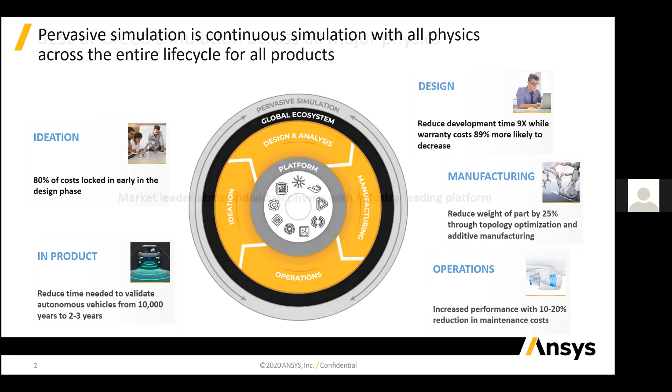ANSYS will basically give you multi-physics information, and by using that multi-physics you will get a platform. In that platform you will have material information; ANSYS has Granta materials, with more than 2000 materials available, and user-defined materials are also available.

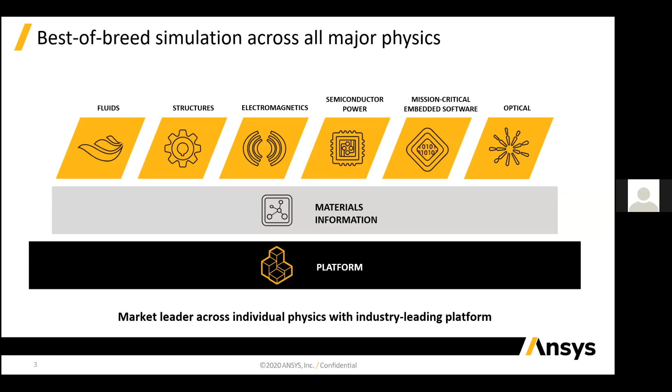Then you can do fluid analysis, structural analysis, and electromagnetic analysis. In that you will do the motor designing, low frequency and high frequency analysis, and noise and vibration analysis. These come under the electromagnetic part, and semiconductor power, and you can also do optical analysis, and get a fair idea about your product designing part.

So what Ansys will basically provide you is a solution for the electric vehicle. Ansys will give you design and development for EV. It will provide you a virtual lab, and that virtual lab you can access anytime, anywhere, and at any scale. Like if you have designed a prototype and you want to change the motor from induction motor to PMSM,

or you want to change the motor type and the controlling technology, like P controller, PID controller, and many other things, like the incremental conductance method, or you want to change to a solar driven electric vehicle. The same prototype is used, you only have to change the machine part. So that was the advantage.

It will provide you a virtual lab, and in that you can do fluid dynamics, structural mechanics, electromagnetic systems, and material science. These are available in Ansys, so you can do that analysis.

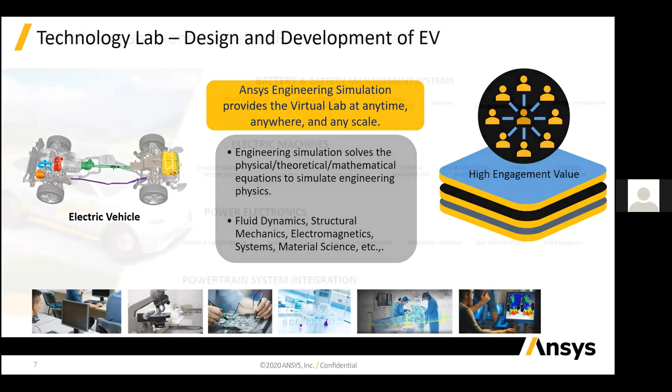So what are the main pillars and main areas of the electric vehicle? If we categorize, it is divided in four parts, like battery and the battery management system, which we will discuss in later slides. The next important part is the electric machine. Where we have IC engines, in EV we have electric machines.

And how we will control that electric machine is by using power electronics devices. Like if the driver wants to run the motor at 1000 rpm, we have to take care of how to control that. So there, power electronics controlling is very important.

After designing your battery, your electrical machine, and your power electronics, the next thing is to make our system run in an integrated manner. How will my integrated system behave if I connect my battery with the machine and the power electronics, and what is the behavior of my machine? That comes under the powertrain system integration part.

First, you can see one paper cited where the 3D model designed in ANSYS predicts information consistent with the experimental results they got. Say you are designing a cell and you want to change from lithium ion batteries to a fuel cell or any other cell technology. You want to change the material of the electrode.

That can be easily designed in ANSYS, and you will get a fair, consistent idea: if I use that type of material, will the capacity of my battery increase or decrease? You will get the anode and cathode information, like the mesh on the surface. You get these things when you design your battery. So the first step is to design your cell. After designing the cell, we will pack our cell.

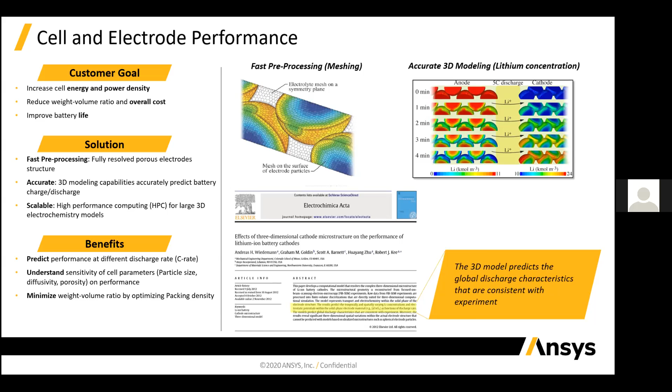After designing the cell, you have to make the end plate. After connecting the cell core to the end plate, the next step is to create the module mesh. After completing the module mesh, finally we want to know the temperature and the current density of my battery.

These things can be analyzed easily using the temperature contour, which will give the information, and the red hot part will show. That red hot part tells you the battery is getting heated at that part only. So we just have to analyze that part and ask how to mitigate it. In software we can easily change the values and redesign our whole battery system, then reanalyze it and check what temperature it is reaching.

For the battery, one more problem I would like to address here: if you are going from Kashmir to Kanyakumari, the temperature varies from one place to another. So sometimes the battery needs to heat up, and sometimes it needs to cool down. You have to design a system that keeps your battery within a certain range.

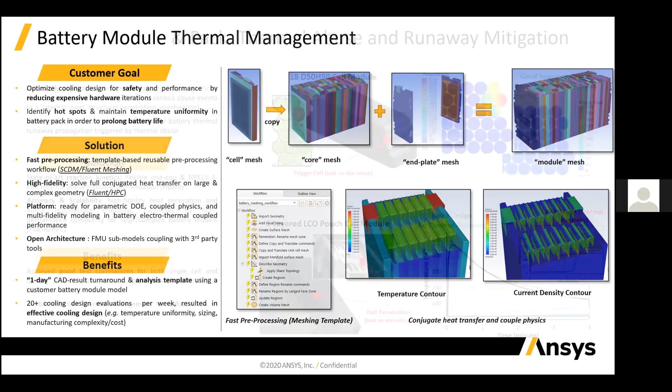Next, after the cell is designed, the end plate is connected and you have created a module, the battery module and pack system are created. After creating the pack, thermal abuse and runaway mitigation is very important. If your battery is getting heated to a certain temperature, you can see here it is heated at this part. A red hot part is created here.

For that red hot part, you have to create a controller so that it is reduced and comes under our specified temperature range. You can see in the graph: with a good design, no thermal runaway happens, and with a bad design, thermal runaway happens many times.

So you just have to go through that when you are designing that battery pack. And this is the main and most important part of your EV. If your battery catches fire, this will basically ruin your whole startup and whole company. If any fire, accident or crash happens, this battery should not be burned. So that has to be considered by doing the crash analysis of your battery. What was the survival of the battery?

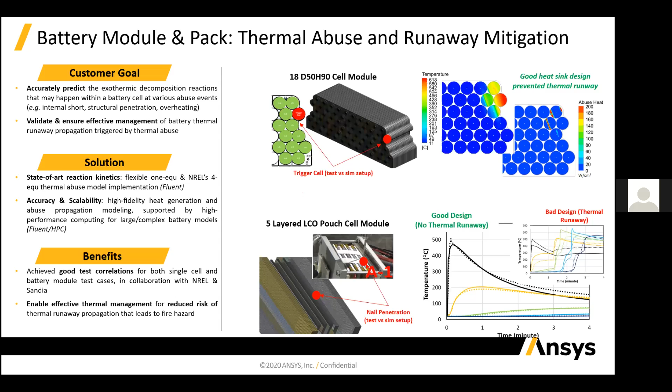So for that, you finally require a cooling system. An air cooled system is already there. So you just have to check whether I will provide an air cooled system, or I have to go for a liquid cooled system. So how will Ansys basically help you in that?

In Ansys, you have designed your whole thermal model, and with that thermal model you will do ECM modeling, equivalent circuit modeling, and in that equivalent circuit modeling we just have to connect it in series and parallel to make the thermal model compatible with the hardware or experimental model. After connecting that, we will analyze it, and after analyzing we will come to know what maximum temperature it is reaching by using the air cooled system.

And for that, Ansys tools like Twin Builder and Fluent will basically help you in designing that. And this will basically reduce your main timing. That timing is very important in today's market. You can see many electric vehicles are coming to the market, but the one question people will basically ask is, kitna deti hai.

That is the very important point when you are designing your EV, because the customer will basically ask you a simple question like this, kitna deti hai, meaning they are focused on: I will use your electric vehicle, but I require that much mileage. So that is the very important thing, and the size of the battery is very important. So you just have to reduce the size and the weight of the battery.

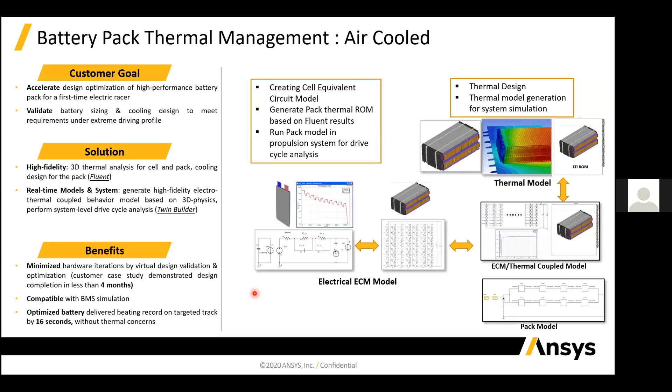For reducing that, you require a more efficient motor. If your motor is efficient, you can easily reduce your source side. And for using that perfectly, you require a battery management system. But before going to that, we will first look into the air cooled system.

So your battery is designed, you have checked with the air cooled system, but your air cooled system is not able to provide that particular value, not able to cool it down. So then you require a liquid cooled system, and in that liquid cooled system you cool it down, and you just have to check, like you can see in this example, this point is heated. So we will mitigate this and we will reduce this. That is the main goal.

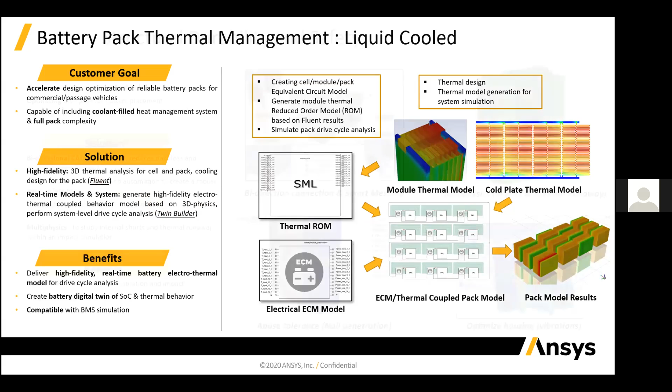We have to check the state of charge and the thermal behavior, and in that part, software like Twin Builder and Fluent will basically help you in doing that same analysis. This is like we have already discussed in the air cooled system. So your battery is created and you are satisfied with the performance of the battery.

The next thing is the durability and the safety of the battery, and how to optimize the vibration part. Your electric vehicle is running, which means you will get vibration. So will my battery survive the vibration? And for that we need to do the nail penetration test. The nail penetration test will basically give you the abuse tolerance level, how to check that.

Okay, and bidirectional smart meshing is there, and the multi-physics impact like thermal runaway, which we already discussed. Next we can also check the vibration part, like if my electric vehicle is running, will my whole system survive the vibration or not. So that we have to check by using this.

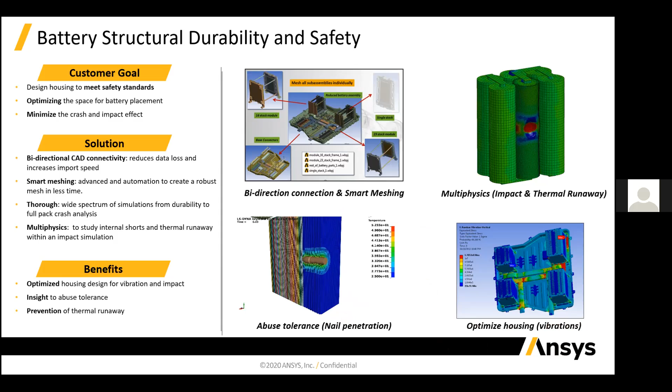So after checking the battery structure, durability, and safety, the next step is battery compliance, EMI, EMC. And in that EMI, EMC part, we can see your battery is connected to some filter design.

You have to design that, and that EMC/EMI filter will basically help you to detect and mitigate the noises, so the noise from the machine, the noise from other electronic devices and the noise from other equipment will not affect the performance of your battery and the battery management system. So you just have to take care of that when you are designing your whole battery system.

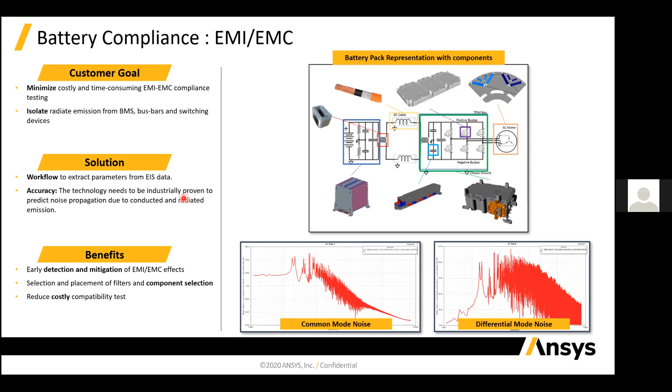So after designing the battery, now you have to connect the battery with the whole system, like the powertrain system. For that you require a model-based system, and you also require a system architecture, software components, and ROM. ROM is basically reduced order modeling.

So now you have connected the whole system, and after connecting the whole model-based system, we have to check it, since many safety standards are there, like ISO 26262. So I have designed it, and after designing I am checking if it is up to the safety standard or not. That is also a very important part when we are going for final designing.

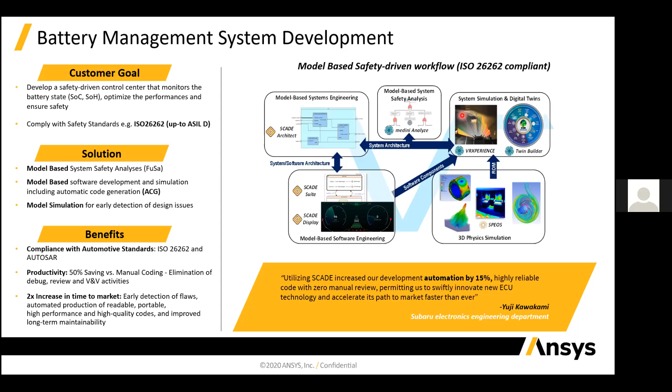Then we have created our battery and the battery management system, and we want to connect it and check whether our model is running as a plant or not. So how can we check it? We have to create an environment like the real-time environment, and by using that real-time environment we have to compare.

After comparing your simulation model, like you have designed your CFD model and the cell HPPC test, and connected it with the battery management system control, you are doing the transient dynamic analysis, and in that you will be able to easily check if the range is reached or it is going beyond your range. So that you just have to check.

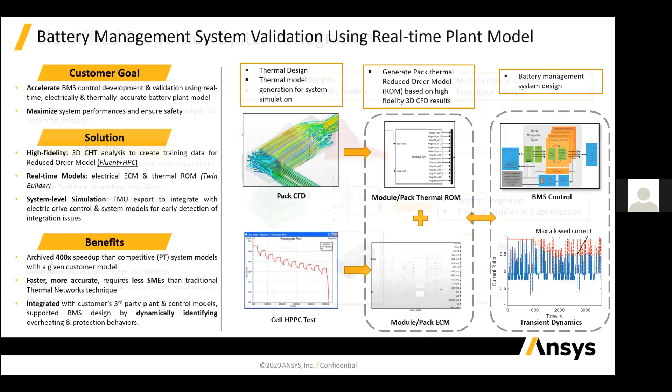Okay, next you have to use the whole connection, the electrified propulsion system integration part, and check the behavior of the battery. For that you have connected a battery, and there is an interior permanent magnet motor, and these are the characteristics of the motor. You import the motor part here, the traction motor PMSM, and that PMSM is connected with the power electronics devices, and the power source, the battery, is there.

So the battery, power electronics device and motor are connected, and you look at the behavior of the whole integrated system, whether the battery is performing well or not, so we will easily be able to check it. This will reduce your time and give you an accurate predictive system. And if you import the same simulation to the hardware, you will get the same result as the simulation.

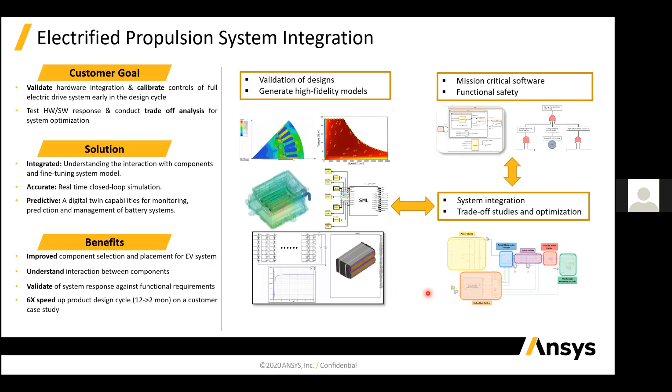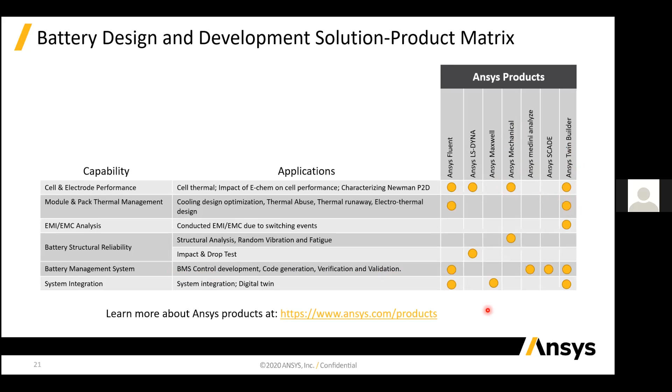Okay, after designing the battery, now you are designing an electrical machine. In that electrical machine, what is the main goal? What is the energy efficiency of my motor? What is the power density of the motor? What is the size of the motor? If you want to make a small electric vehicle, the size of the motor cannot go beyond a certain limit, so size is also important.

What material is involved in designing the motor, like is a permanent magnet involved or not? If PMSM or BLDC is there, then a permanent magnet is involved. So we also have to look into the availability of the materials and the designing part.

And in that you will require fast innovation. And for that, you require the electric machine team, and they will basically provide you information about the torque-speed characteristics and the efficiency map of my motor. So they will basically provide you information related to this.

And the next is the thermal design part. In the thermal design part, what temperature my motor is reaching, and what is the behavior of the BH curve of the motor, the material of the motor. So that will be very useful when you are going for the final prototyping of your design.

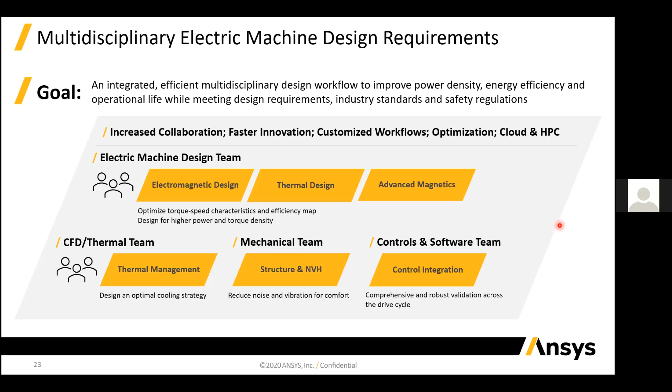And then you come to the control and software team, the control integration part. Like you have provided a drive cycle: IDC is the Indian drive cycle, and MIDC is the modified Indian drive cycle. For that particular drive cycle, what is the behavior of your motor? So you can check the drive cycle to see whether your motor will run perfectly or not. And if you include slope also, you can check your motor performance.

So the main thing is the design and specification, like what motor we have to select for the particular application. Like if you are designing for an e-rickshaw, there is a constraint that speed should not go beyond 25 kilometers per hour. So we have to take into consideration which motor I will select for that particular application, and the selection of topology. And the next step is to check the efficiency map and the flux density.

And for that, Ansys will provide you Motor-CAD, and in Motor-CAD you can do the magnetic analysis, thermal analysis, and mechanical analysis, and you can do the efficiency mapping and the performance analysis using the drive cycle already present there. So for fast calculation and fast checking of your motor performance, you can use Ansys Motor-CAD. And you can also do the optimization part there.

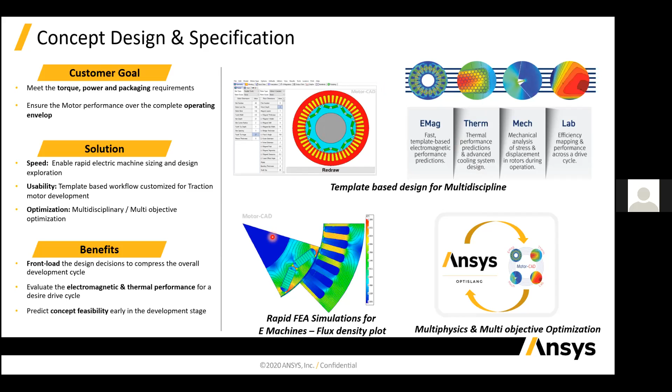And in that optimization part, there are many factors involved in the design of the machine, like slot number, length, magnet length, and the angle between the magnets. That is also very important. So you just have to check, if I change something in the design, what behavior I will get. You can easily do it in Ansys Motor-CAD, and it will easily give you the thermal performance, and you can predict the performance at the development stage.

And then we have the advanced magnetic analysis. In advanced magnetic analysis we can select the material, and we can also run simulations through HPC, which is high performance computing for electromagnetic modeling. This will improve the performance analysis in greater detail. It will also give you information about the material characteristics, BH curve, and the many performance trade-offs. You can also check the demagnetization, magnetization, and robustness of your motor. And by using optimization, you can also reduce cost.

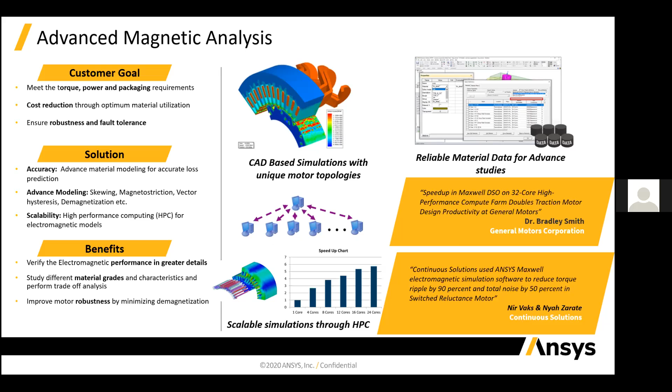And after designing your motor, the main thing is the efficiency map and the torque-speed. You can see here an efficiency map of a motor, and the blue dots are a driving cycle imported into the efficiency map. From that driving cycle, you will come to know the behavior at starting, like the starting torque at low speed, and after reaching 4000 and 8000, the behavior of torque and speed. So you just have to check that.

And you can also come to know about the performance of your motor. So you can also do that part. And Ansys will basically provide you a machine toolkit, and in that toolkit you have to select what type of machine you are interested in, what type of control strategy you are interested in, and you can basically run your machine.

And you can also see here, the experimental result is here and the simulation result is there, and you have done your simulation in Ansys, so that simulation will accurately predict the electromagnetic performance. This will give you information that you can believe the simulation part: if I'm making such changes in my simulation, the characteristics and behavior of the motor I will get in the experimental, so we can also check it and compare it.

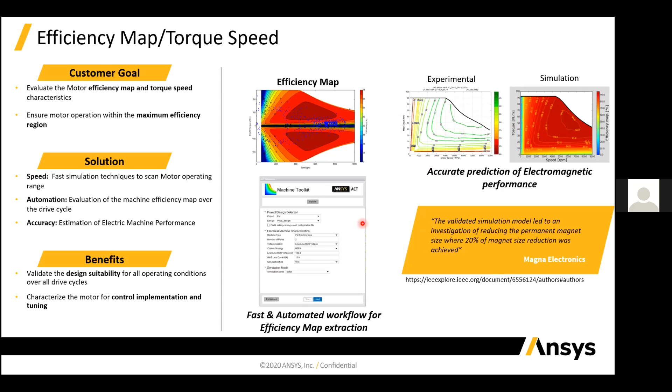And the next part is the thermal management part. You have designed your motor, and like we have designed a battery and we have to cool our battery also, here we have to cool our motor. For cooling that motor, we have the magnetic field, the EM loss components, magnet loss, core loss, and the copper losses, and then we want to map those losses to the thermal management, and from that temperature we can also map it.

And after doing that, you can see here oil spray cooling is there, so you can also change that cooling part. One of our customers, Lucid Motors, increased the efficiency of the motor by doing that temperature prediction. You have designed a motor and only some part of your motor is getting heated, so you just have to take care of that part only.

And if you take care of that part, then you are able to increase the rated temperature, and you can also increase the effect. You can also provide your motor effective cooling, and you can also reduce the size of your motor.

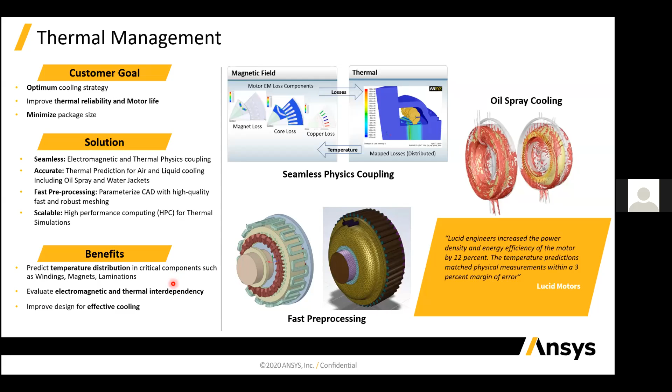And you have designed your motor. Now noise, vibration and harshness analysis is very important when you are finally selecting your motor. So the noise vibration test uses MBD, multi-body dynamics, on the motor you have already designed, and then we use realistic sound. That will create a waterfall diagram, which gives information about the noise, and where the noisier parts are, we will easily be able to detect and then remove them.

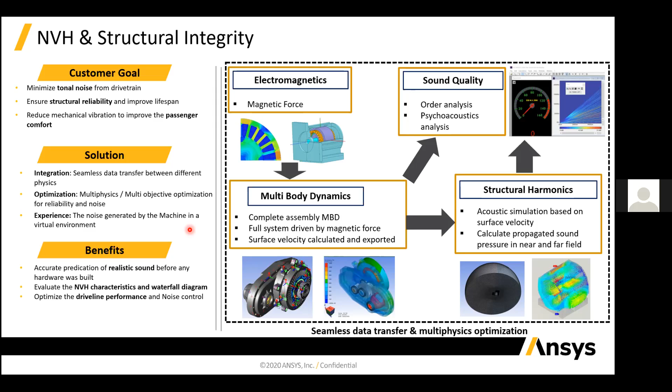For example, you are going in an electric vehicle, and in that electric vehicle you are getting a noise. That will not be good for passenger comfort. So we have to take care of that noise part, and find the point where we are getting less noise, and if you are going for an automated system, that automated system will not be affected by the other noise, so we have to take care of that part also.

If you go directly to the hardware and any problem is there, you cannot change it directly, but in software if you get problems, you can easily detect and mitigate them, so this will basically reduce your whole cycle time from 6 months to 4 weeks.

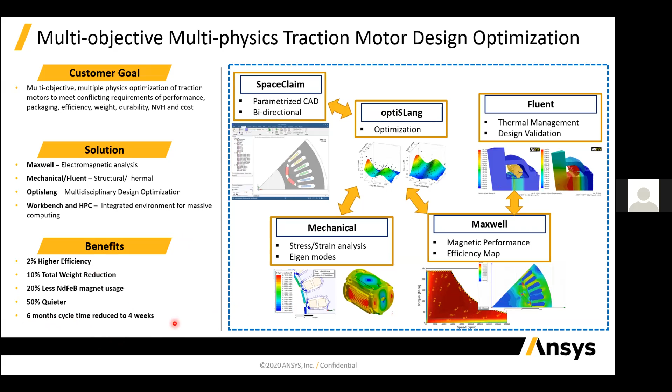After your motor is designed and the vibration test is done, we are controlling our motor. For controlling the motor, you can use HIL integration, hardware in the loop. You can also use ROM, reduced order modeling, and by using that in Twin Builder we can connect our motor with the power electronic devices and source control, like an inverter, and check the performance of the whole motor.

So we can do this using the HIL, hardware in the loop process, and that will help by giving you final information about the performance of your motor, and its behavior when connected with the power electronics inverter. With power electronics devices you can also check the switching frequency. We will go one by one there.

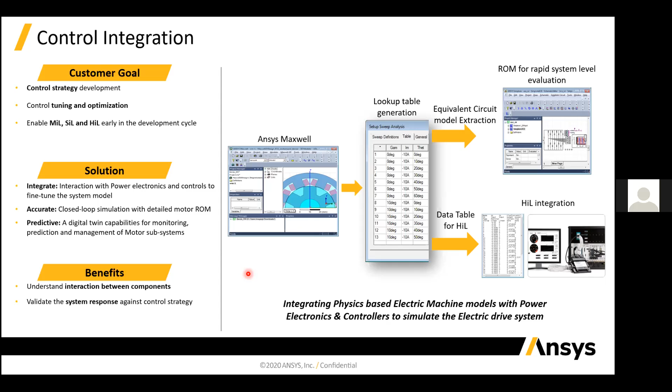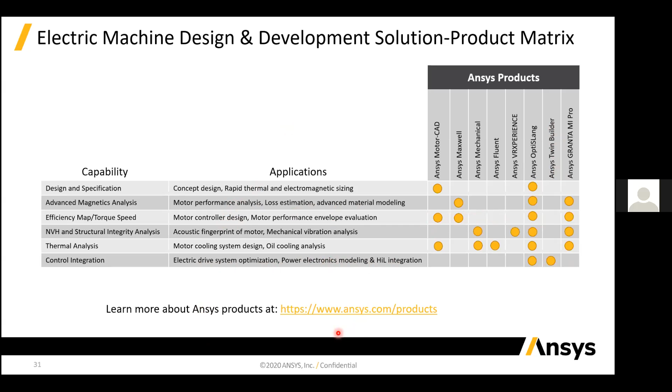Next, you have designed your motor and your battery system, and now you want to control your whole system. For controlling, you require power electronics design and development. In power electronics, we want to reduce the losses and make an efficient system: noise and overvoltage should be reduced, overall protection should be there, the lifetime of the whole system should increase, and the losses in the power electronic devices themselves should be reduced.

So we have to take care of these things when going for the power electronics part and controlling the whole system, and reliability should be there. For the electrical system and circuit, electrical people will do the optimization, circuit design and efficiency part. Mechanical people will do the reliability analysis and help us mitigate

future component failure. The software team is helpful in the embedded control system, like when 10 electric vehicles are running automatically and taking information from the cloud. That information should not be hampered, like when some car wants to speed up and some car wants to slow down.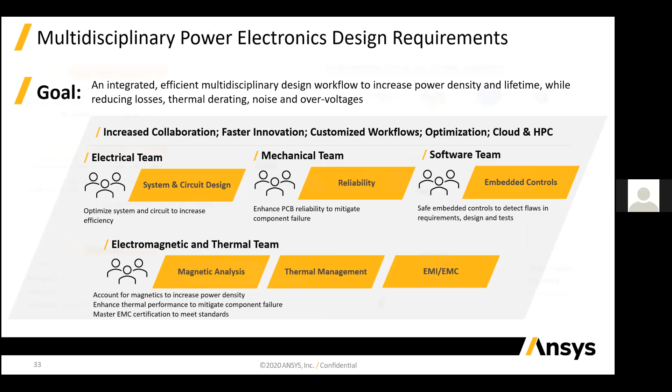So the first and main step involved here is the optimized system and circuit design. We have a whole system, and that system should be optimized. That is the main thing. You can see here a regulated flyback converter. Before going into that detail, say you have a DC machine and you want to control its speed. For controlling, you require some controller.

For example, you have a battery of 48 volts, and the motor you have designed is 310 volts. So how do you connect the 48 volts with the 300 volts? For that, we require power electronics devices. A DC-DC converter should be there to increase the voltage. Sometimes we have to decrease the voltage. So there we require a boost converter, buck converter, and for both increasing and decreasing, we basically have to use the Cuk converter. So we have to plan which topology of converter to select.

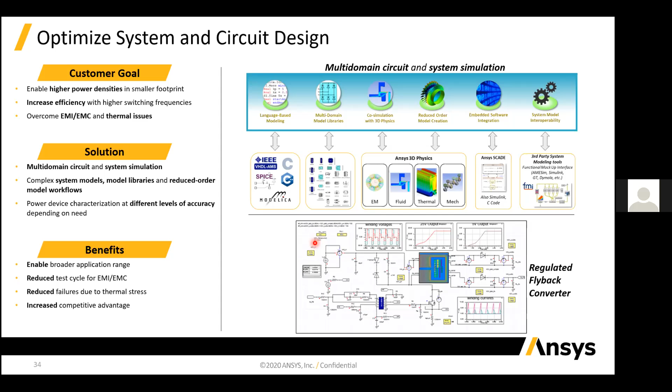So you can see here, this will basically give you a solution for the multi-domain circuit, and you can get the different power level and the different accuracy level also. So this will basically enable you for broader application. This will basically increase your competitiveness.

And after doing that, the next thing is the magnetic. So like you can see here, a cable is there, and in that cable you can see the flux and the other things. And you can also design the electronics transformer, and by using that, we have connected the PMSM devices there, and we are controlling the speed of the PMSM. So for controlling the speed of the PMSM, we require an inverter, and space vector control is there. So in the inverter part, we have connected an IGBT, so that IGBT should behave the same way we require as hardware.

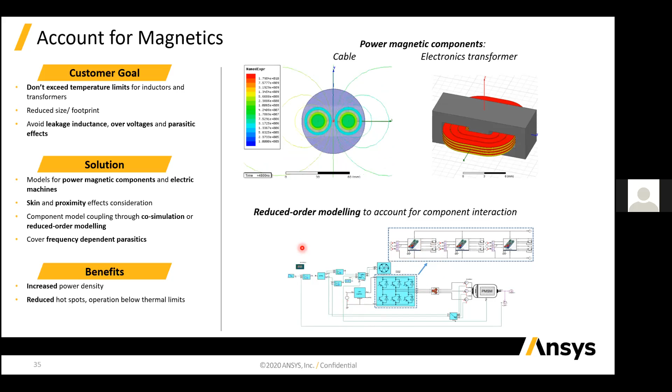So we have to import it by using the datasheet of the IGBT. We will put all the information like temperature range and the characteristics graph information into this IGBT part, and that IGBT will connect to the inverter, and that inverter will run. And then if we check that inverter part, we will get perfect information like what temperature range of the IGBT we are getting, if we have to change that IGBT with a higher value IGBT, or if we only have to change the connecting wire of the IGBT. So that information we will get here.

And then like you can see here, a hot spot and thermal limit prediction is there. A hot spot is created, and that hot spot will give you info like heat, that the IGBT will be heated at a particular place. So we just have to prevent that component failure. So we just have to take care of that thing. And next, we just have to check what the customer goal was. If you are a customer or a manufacturer, that hot spot will not be good for your whole design, like this will create a burning part and other things. So we just have to check it, or remove and mitigate it.

The same you can see here, like we just have to change the width of the wire, or change other parameters which make this IGBT heat up. So we just have to look into that, check that part and remove that thing. And for that analysis, we require lots of information, and that information will come from the datasheet, and then we will analyze it.

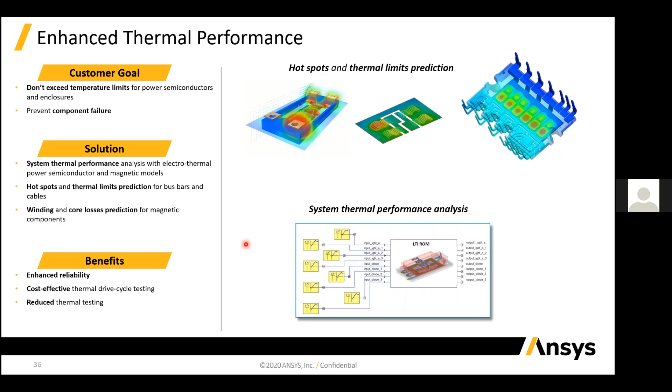And after analyzing, the next is the embedded control system, and for that we require the SCADE suite, and that SCADE suite will give you information, and this will reduce the development time and the cost. And this will also help you ensure the safety of your whole created system. Like the motor is there, the inverter is there, and you are using the control system, and that control system will be provided by using the SCADE suite.

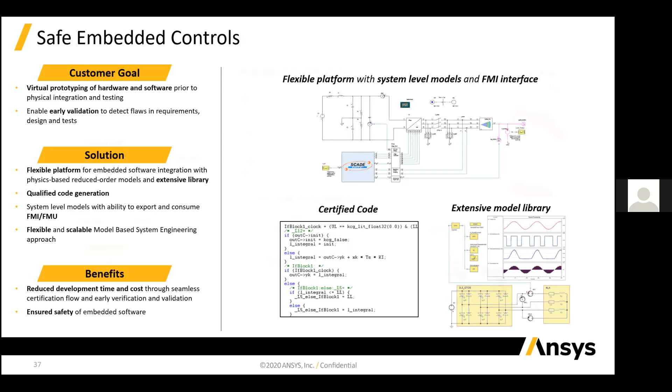And after that, you require an EMC and EMI certificate. Like you can see here, a radiated noise prediction is there, like noise is there, and we just have to remove it. And this will give you early detection and mitigation. So you can early detect and mitigate that, and you can also reduce the time and the cost by 20 to 40%.

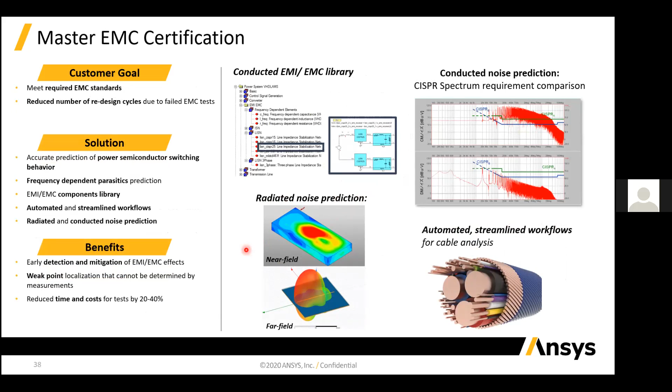And after your whole electronics device is connected, there is the enhanced PCB reliability part, and that PCB reliability part is also important, and the life prediction of the PCB is also a very important part. Like what is the life of your whole PCB, whole design and whole component. When you are going for hardware prototyping, this will help you reduce the cost of the whole material, because it gives you virtual information, so that will reduce the cost before going to the hardware part, and this is easy to use and will help you determine the failure estimation.

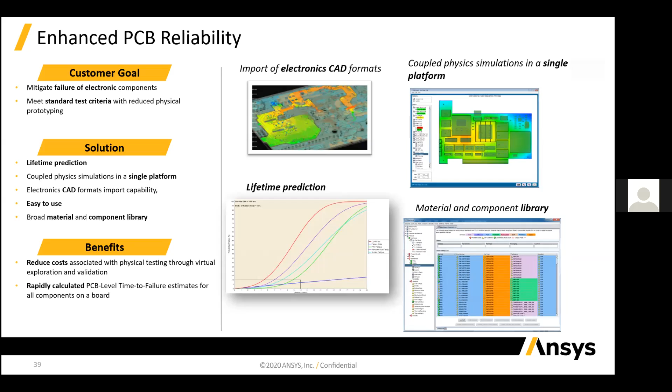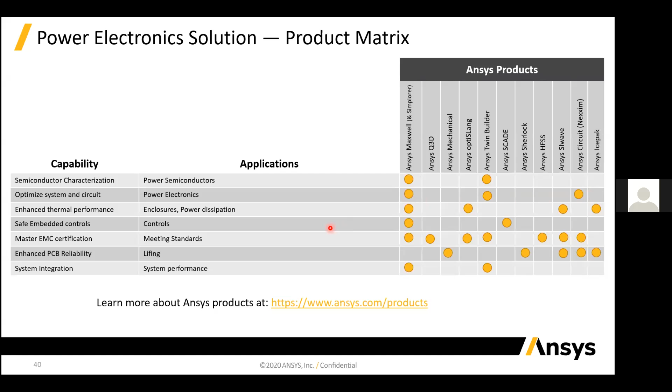And these are the ANSYS products, and those products are already in use for designing the battery, the battery system, and other devices like the motor. So you can see here, for power electronics you require ANSYS Twin Builder, ANSYS Circuit, and ANSYS Maxwell. We are also using these for the battery and the motor system.

So now what we have to do is use the electrified powertrain system integration part. We have perfectly designed our battery, we have perfectly designed our motor, and now we have connected them with the power electronics devices. Now what was the behavior? So for that, electrified powertrain system design is there. Now we just have to validate our whole system.

System integration is divided into two parts: component validation and system architecture. And as I told you, a third-party ecosystem is also there, like MATLAB, GT-SUITE and co-simulation. We can easily import and export the information of the whole system and subsystem integration. And a component library is there. That component library is for the design of the electric machine, gearbox, inverter, and the battery management system, so this information will be present there.

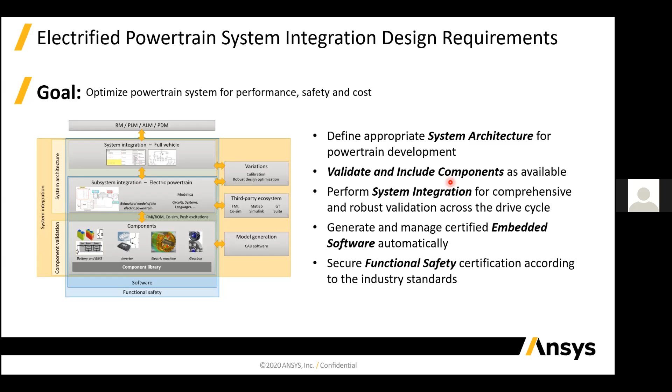And now you have designed your whole system, and you are connecting it in an architecture form, in a powertrain system format. You have connected a battery using a bus bar to the inverter, the buses, the motor, and the gear. And the next step: you have designed one architecture, and now you want to change the battery, so you can easily change the battery part. You want to change the motor part, you can easily change the motor part. So you can easily change your one architecture design.

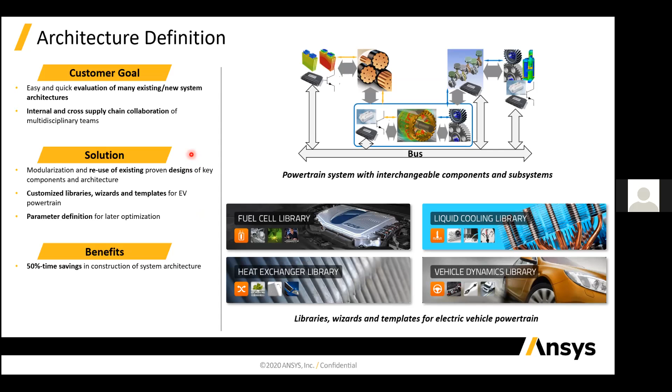A fuel cell library is there, you can also change it. A vehicle dynamics library is there, you can easily change it. And if you want to change anything related to heat exchange, this will give you that: if you have designed for any one car, you can easily change the range and the other things. That will give you a benefit like 50% saving when going from one design to another. So by using ANSYS you will get this advantage.

And the next is multi-level and multi-fidelity. You have information in the form of 3D multiphysics, and you can also have information from design of experiments (DOE) or measured data. What you have to do is put in the whole information, like the requirements and specification of the EV, and the subsystem design of the EV. And after that we go for optimization. This information will be given to one system, and then we will analyze our whole architecture.

And by using that whole architecture design, we can finally conclude that we have a motor and a battery giving us that particular information, and the driving cycle of the battery and the motor which we are using. So that will give you the whole information about the EV. And that whole system will be reusable, so you can reuse the existing model.

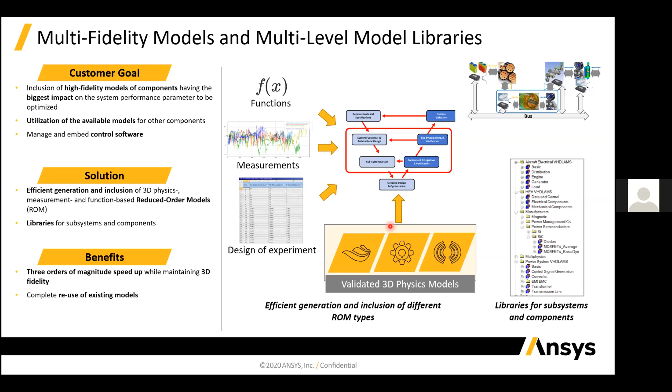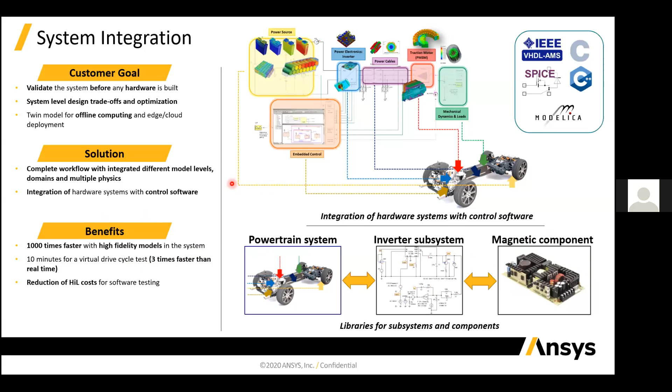And then we require embedded software. That embedded software will basically be used in the V&V, verification and validation, process. So we designed and already modeled, and now we will get code, and the software model test will basically give you the performance of my vehicle and the in-tune design of my vehicle. This will accelerate your whole process before going to the V&V process, it will be reusable, and it will increase the whole efficiency of the system.

If you are using one system and going to another system, you just use that template, and that template will be helpful, and this will reduce and minimize the software detail. And you can easily detect errors also.

Other essential things will run on solar. If you have AC in your car, and that AC requires lots of power, that AC will be controlled by solar, and the other systems will rely on the battery system. The battery will be connected to the motor part only. So you can separate things like that to make your electric vehicle more efficient.

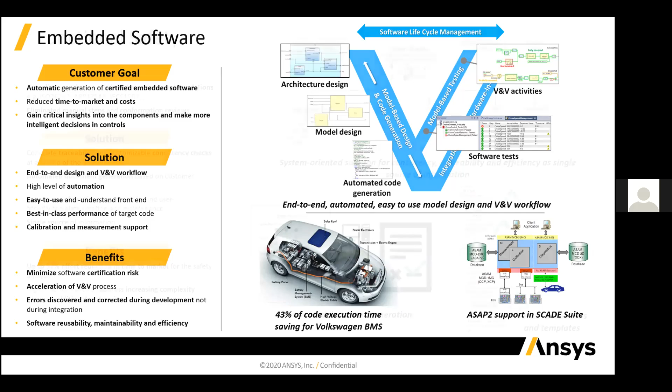And the next is to provide functional safety, and the certificates related to functional safety, like ISO 26262 and IEC 61508. A functional safety certificate is required: you have designed your electric vehicle, and your electric vehicle is working fine, but you require some information.

A safety certificate is also required before going to the prototyping part, and that requires HAZOP, FTA analysis and FMEDA analysis. These analyses can be easily done, and you can also check the system-oriented solution for consistency and traceability, and this will benefit you. Up to 57% of the effort to market will be reduced, complexity will be handled for high performance, and additional cost savings will increase.

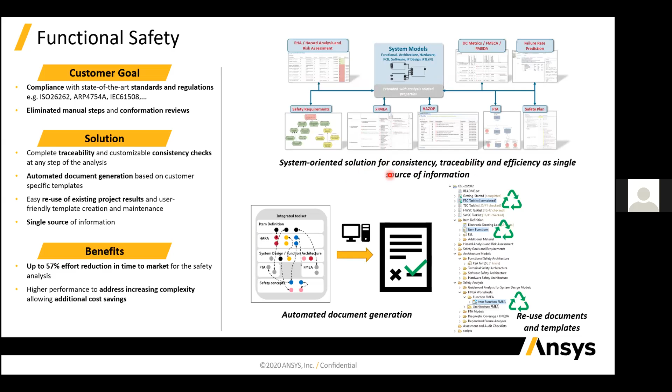And now we have an open environment. You have designed your battery, the power electronics and the whole system, and now by using system simulation you want to validate it. So for validating you require simulation results, and those simulation results will be given to the model along with the physical test and measured data, and that will be given to the HIL, hardware-in-the-loop, part

using FPGA or any other component and CPU. Between the CPU there will be signal conditioning. So the co-simulation exchange between the data and the hardware-in-the-loop data will happen to provide you correct information and reliable results between the software and hardware parts.

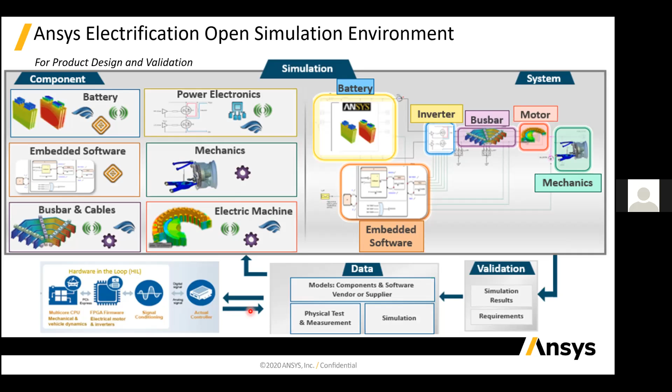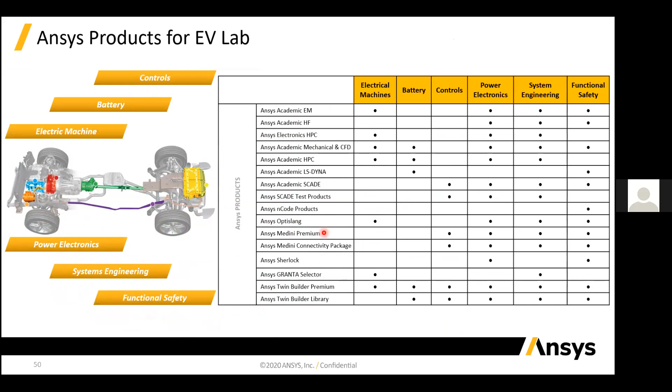for the machine part, what new you want to do. You can design a new motor topology. You can do safety and reliability tests for the motor. You can also do the control part, like motor control: how I will control it, to what extent I will be able to control it, and what braking system I'm using.

For example, if your electric vehicle is going up a hill, the gradient force is very important, and you have to take care of that.

Okay, so that force part is a very important part, and there you will look into that gradient force will be more than your aerodynamic force, more than your rolling resistance force, so that you just have to take care. And what is the control system I can use there.

And for that you can see, right now regenerative braking is used up to 30% or 40% in electric vehicles. But if the regenerative braking efficiency increases up to the 70% or 80% range, that will be very beneficial for EV design. Like your electric vehicle is going up the hill and coming down the hill. If regenerative braking is 100%, then there is no loss between these two transitions, meaning minimum losses.

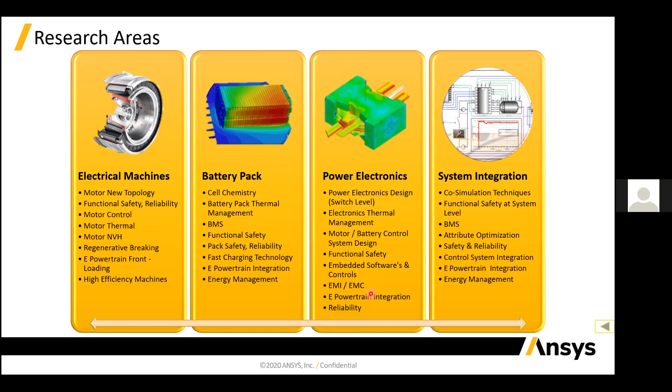And in ideal condition, if your machine is in ideal condition, your EV is in ideal condition, then it requires a very small amount of energy. But the petrol engine still requires energy. So you have these advantages of EVs compared to ICs. So what are the opportunities for students going for EVs? What is the opportunity and what advantage are they getting?

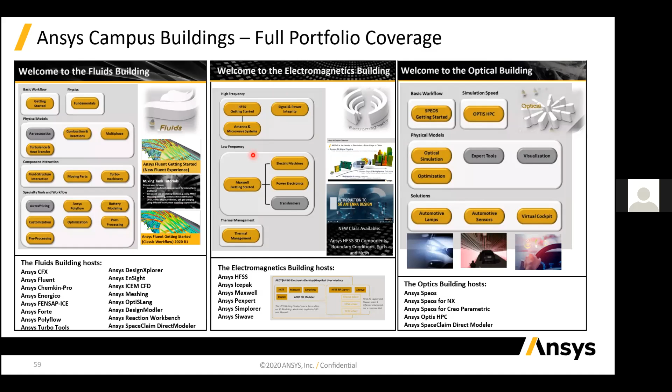Okay, so I think we have questions in the chat box, so we will first look into that. Okay, kindly throw more light on design and development job.

Okay, so in design and development, you will get a job like design engineer, design engineer for the power BLDC motor. Somewhere on LinkedIn, you will find the link for that. They require design engineers for BLDC. Sometimes they require design engineers related to PMSM, and basically you will get a job related to the power electronics controlling part. Like if you are running your motor, how can I control my motor? So that will be very important when you are searching for a job.

And if you are interested in battery management systems, there is also lots of scope. Sometimes they require DC-DC converters, and sometimes they require an engineer who knows how to connect that DC-DC converter with the whole EV machine. So you can also search for jobs in design and development of the converter part, the inverter part, and the whole EV system. You can also get that.

The next thing is the ANSYS campus building, and that will basically help if you have an idea and you just want to put your idea down and get fast calculation of your idea. So ANSYS Discovery is there. By using ANSYS Discovery, easy-to-use tools are available, and from there you just have to put your idea in. And many tutorials are also available in the ANSYS Discovery part, and there they will give you information.

Like if you are starting your career in designing motors, and you don't have basic knowledge, the ANSYS Learning Hub will basically provide you information like how I will start, how I will proceed, and how I will change the design part. So you can also do that. And this ANSYS Learning Hub has a private room, and customization is there. Okay. And you can also do that by using it. Many examples are already present there in the customer portal. Like if you are an ANSYS employee, you have ANSYS, so you can directly use that.

Okay. Right now it's okay. Now we have an ANSYS Learning Hub, and that ANSYS Learning Hub will basically give you more information about how we proceed, and this will basically give you a blueprint for getting information, and many other things are also involved in that. So you can also check the ANSYS website.